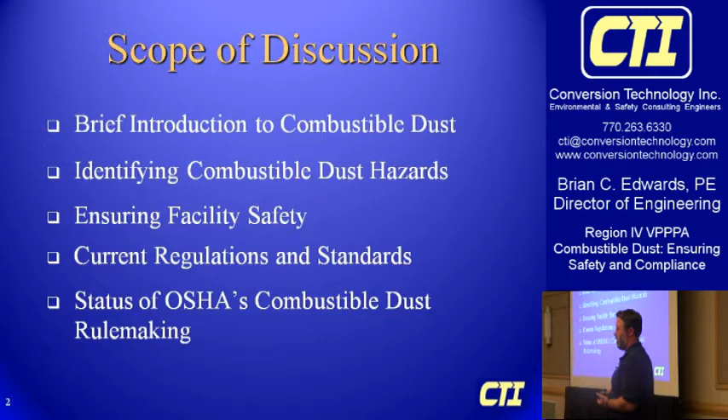So just in general, combustible dust is a major issue in industrial facilities that generate this product. The Chemical Safety Board said that of the top 5 worst industrial accidents that they've investigated, 3 of those involve combustible dust. In 2008, following an explosion in Savannah at Port Wentworth Imperial Sugar Plant, OSHA reinstituted a national emphasis program.

That helped them conduct inspections under the program and provided industry guidance. In October 2009, OSHA came up with an advance notice of proposed rulemaking where they said they're going to work towards creating a combustible dust rule. And some states have went ahead of OSHA, such as Georgia and California, and they've instituted their own rules about combustible dust safety in the workplace.

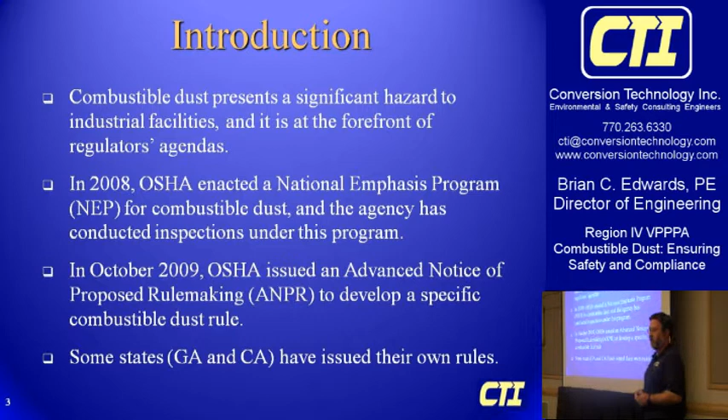Just in general, what do we mean when we talk about combustible dust? We're really talking about any particulate solid material that can present a fire hazard when dispersed in the air, regardless of size or shape. This is according to NFPA. Traditionally, if it's a combustible particulate solid and you throw it in the air and it creates a cloud, it floats around, stays in the air, then you might have a combustible dust. This is typically dry foods, wood, plastics, textile, organic materials, and even some metals such as aluminum, magnesium, things like that.

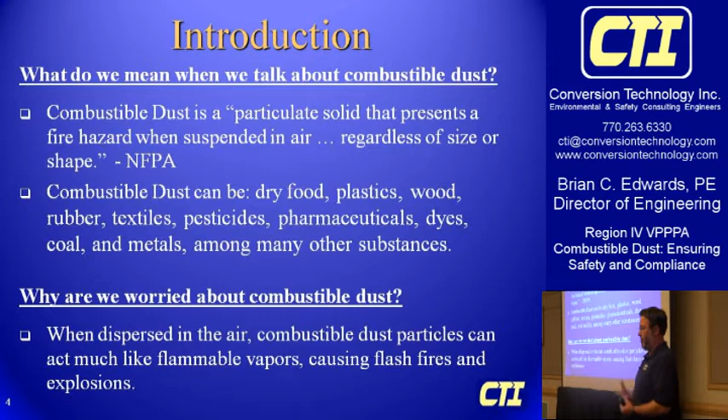And why we're really concerned about it is because when you disperse it in the air and you have a thick enough dust cloud, if you ignite it, it acts much like a vapor cloud. So people think of solid materials as burning different than, say, vapors or liquids. But if you disperse dust in the air, it can have a flash fire just like a vapor cloud. And the reason that happens is because the rate of combustion of a material significantly increases as you get smaller particles.

And what happens is, if you remember the fire triangle, you have to have fuel, you have to have oxygen, and you have to have heat. So say you had a log, all the wood particle, that fuel that's in the middle of the log, it's not touching oxygen. So you're missing part of the fire triangle.

Well, if you turn that log into sawdust and disperse it in the air, then all that fuel is touching oxygen, so all of that fuel can burn at once. You don't have to burn through the outer layer of the log to get down to the center of it, so basically all of it will burn in an instant, just in a flash. You have a flash fire, and that's the danger here.

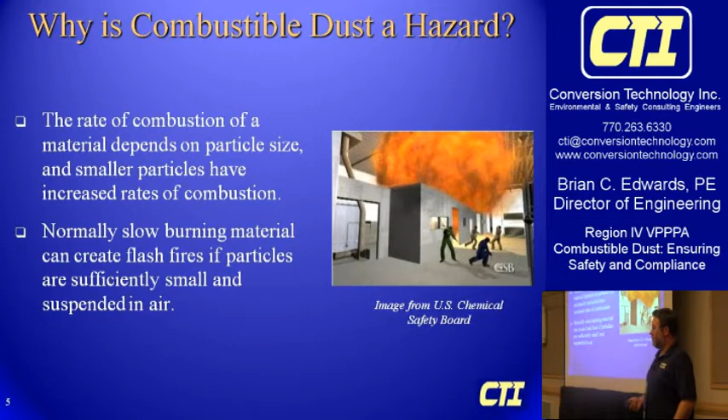One of the largest dangers is that dust can accumulate in overhead and hidden areas. The stuff that accumulates in those high areas is often the finest material—the stuff that's lightest, that hangs in the air the easiest. So it accumulates in these hard to reach, hidden areas.

You can have a primary explosion, say in a single piece of equipment, like a dust collector or a boiler, that sends a shock wave through and disperses this dust cloud. Then basically the entire room can be filled with this hazardous dust cloud atmosphere. If that ignites, it spreads throughout the entire facility. So something that was isolated in a single piece of equipment disperses accumulated dust and creates a secondary explosion that could decimate an entire plant.

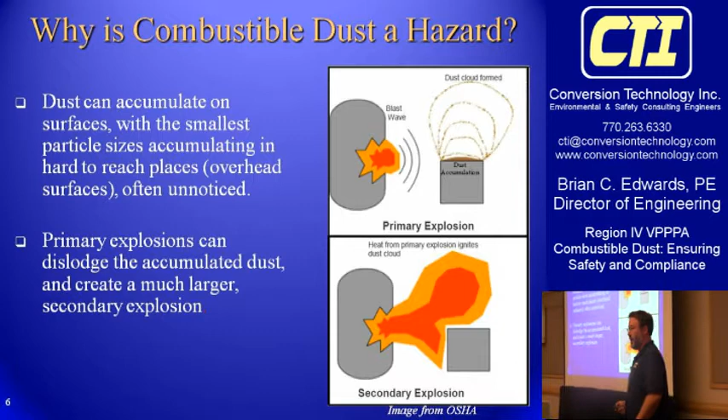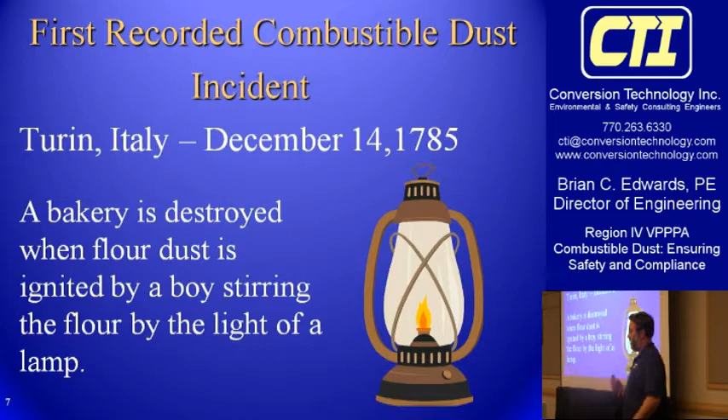I mentioned that the National Emphasis Program came out in 2008, but this has really been an issue for a long time. The first actual recorded combustible dust incident happened in 1785 in Italy. A boy was stirring flour by the light of a lamp, he created a cloud, and the lamp ignited the flour and destroyed a bakery.

Some examples of incidents just this year: this one was in British Columbia at a sawmill, the second large explosion at a sawmill in this area of Canada this year. This most recent one had 2 killed, 22 injured. The first incident, the other explosion in British Columbia, was similar—multiple fatalities and a lot of serious injuries.

In this particular incident, a resident 2 kilometers away felt his house shake and vibrate because of this explosion. One interesting thing to note is that a change of material was probably a large source of this incident.

I don't know how many people are familiar with sawmills and planer mills, but typically in a sawmill you're processing green lumber, so it has high moisture content. It clumps together—that green sawdust doesn't really form a dust cloud in the air. The high moisture content means it doesn't have much flash fire potential because you have to evaporate the moisture before it burns. So you don't get the flash fire like you do in a planer mill, which dries the wood after a kiln and creates fine wood shavings that are a lot more combustible.

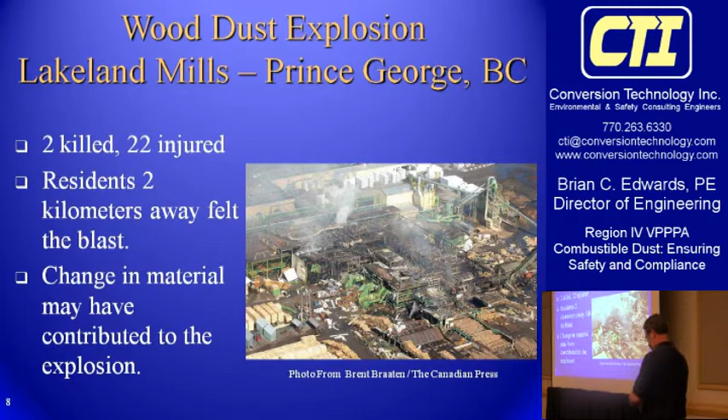We'll get into some basic definitions. How many people have ever heard of the word deflagration? It seems like a pretty knowledgeable group here today.

In general, when we talk about deflagration, you can think of a flash fire—imagine a fireball that consumes a dust cloud, flashing through an area. A dust deflagration goes very fast, still talking less than a second, and it can move through an entire area. It goes a little slower than a vapor cloud—vapor clouds go quick, dust clouds are a bit slower, but still within milliseconds, less than a second. Still not enough time for somebody to get out of the way of these deflagrations.

So how do these occur? You need small enough particles—fuel, these are combustible particles that when thrown in the air can float around and create a cloud.

You need that fuel to be in a cloud of sufficient concentration to propagate the flame front. Imagine a little speck of dust—when it ignites, it has to be close enough to the next piece of dust to ignite it, creating that flash fire. Next, you need available oxygen, and then some type of ignition source—some energy or heat source.

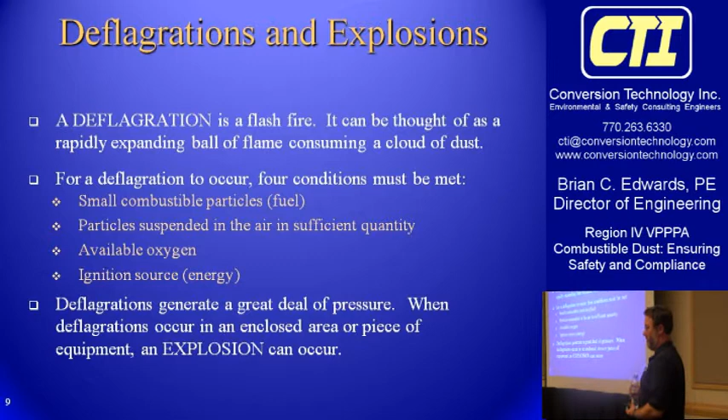When deflagrations occur in open air, they still generate a pressure wave from the overheating gas. But if you put that deflagration inside an enclosed area, like this room, or inside a piece of equipment like a bag house, dust collector, or bin, that enclosure can't contain the pressure generated when the flash fire occurs. That's when you'll have an explosion.

I like to think of deflagrations and explosions as cause and effect. You have a deflagration that occurs inside a vessel, and that is the cause of the explosion. Technically, an explosion is the rupturing of an enclosure—when that enclosure ruptures, it releases that pressure outside. So a deflagration occurs inside an enclosed area, and it causes an explosion.

Industrial dust explosions can create chain reactions, moving through areas in the plant. It might start in one room—you have an explosion, it blows out a wall into the next room, blows out another wall, and it goes through. This can also happen in the process itself. For instance, you might have a cyclone that exhausts to a bag house. An explosion can occur in the bag house, and the flame front will actually travel back upstream against the flow of air, back to the cyclone.

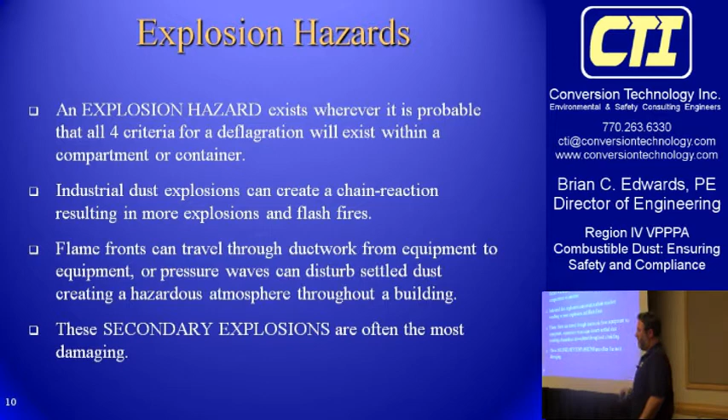I've actually seen this happen several times. One time I was in a plant—a wood pellet mill—that had one bag house tied to two separate cyclones on two different lines. They had a deflagration occur in one cyclone. The flame front went to the bag house, exploded, and traveled back upstream to the other cyclone, and also upstream into the process area where they had connections going inside the pellet mill itself around equipment. Often these secondary explosions, this transfer of explosions through the process or through areas, are the most deadly.

As I mentioned earlier, OSHA has put out an advance notice of proposed rulemaking, but they don't have a rule yet. So you can't afford to wait on OSHA before addressing these hazards. I'm going to go through what you should do at your facility to address combustible dust hazards. In general, the first step is to really understand what type of hazards are present.

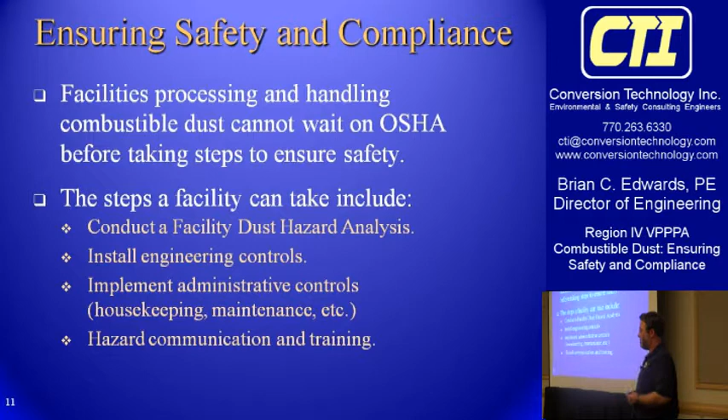You can conduct a facility dust hazard analysis so you understand how severe the hazards are in your workplace. Next, you'll want to install engineering controls and at the same time implement administrative controls such as housekeeping and maintenance. Also make sure you implement hazard communication and training.

So how do you really identify the hazards in a workplace? I'm going to go through the steps you need to take to identify where combustible dust hazards might exist and how to quantify them.

The first step is to know what type of dust you're handling—what dust is combustible, what isn't, and a relative value of how dangerous the different dusts are. Next, itemize all the processes where this dust is handled, generated, and processed. Then look at the open and hidden areas, the rooms and facilities, and identify where dust accumulation is present. Finally, you also look at ignition sources.

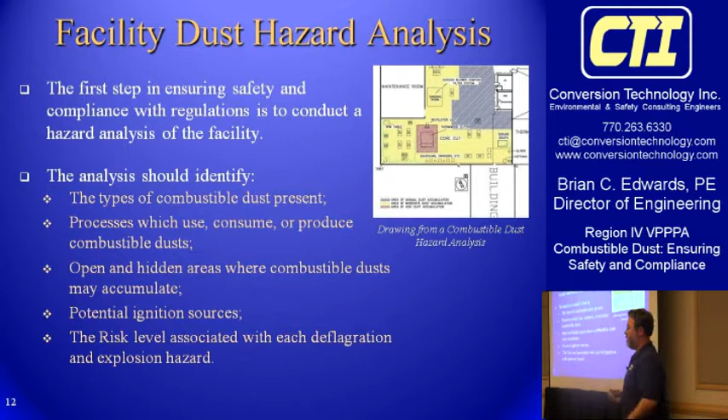Then you want to rank how dangerous these different places are, because not every hazard is equal. As I'll describe later, addressing this can be very expensive, so you want to make sure you take care of the most dangerous aspects first. Then come up with priorities—you'll want to try to come up with some risk ranking.

Okay, so the first step is identifying the types of combustible dust. You really want to look at all processes to see what type of dust is handled. Do we handle powders? Do we add components, or do we create powders? Or is our dust just a byproduct of what we do? Is it coming off grinders? Is it coming off milling? Is it not really a main part of our process?

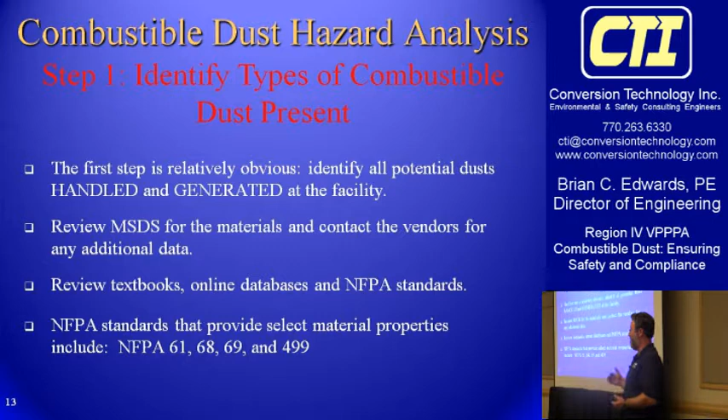If you're somebody that handles powders, you want to look at MSDSs, contact the vendors and manufacturers, and see if they have any data on the dust. If they don't, and if it's a common material like flour or sugar, you might be able to look online, look in textbooks, or look in some of the NFPA standards, which have some of these dust explosion parameters. But more often than not, you might not get data from a vendor, and that data won't be readily available. Not everybody is handling something as prevalent as flour or sugar or wood dust, so you might have to go out and get your own data.

So I'm going to discuss a little bit about the tests and how they're used. There are a number of labs where you can send your dust to be tested to see how dangerous it is. The first three tests I talk about deal with how easy they are to ignite, so it's about ignition sensitivity. The next tests deal with how severe an explosion is if it occurs.

We talk about minimum explosive concentration, and what that tells you is how thick a dust cloud has to be in order for there to be an explosion or deflagration. If you're familiar with industrial hygiene and IH standards, dust exposure is normally measured in milligrams per cubic meter in the air, so that's stuff you might not even see. When we're talking about explosible concentrations, we're talking about grams, so like 1,000 times higher than what you'd want to see from a respiratory standpoint.

Because of that, typically you're not generally operating at a minimum explosive concentration in the area. But inside process equipment, you can be at that level, or if you have that dust disturbed in the air, you can reach that level.

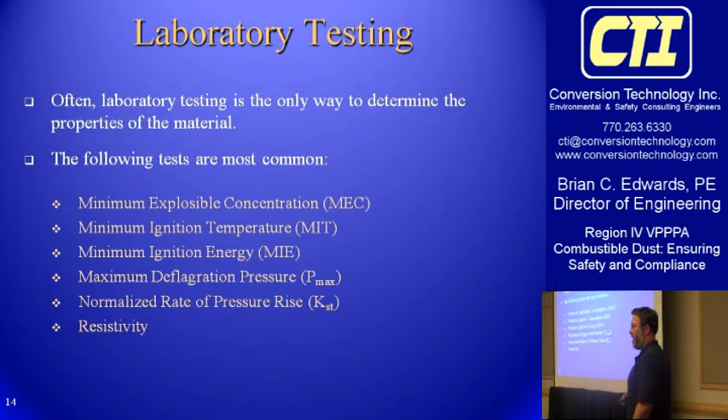Next step you really want to itemize and understand where dust is being handled, where it's being generated, what type of processes you're talking about. Look through your facility, come up with a checklist, deal with anything like particle size reduction equipment. That's going to be hammer mills, hogs, chippers, any grinding type operation. Those create dust, and they're also high likelihood ignition sources.

Also, you want to look at bins, tanks, and silos, because when you're filling a bin or filling a tank, that's one of those likely times where you might have an explosive dust cloud in the void space. As you're putting solid material in there, that lighter material still fills that space, so you can have explosions there. Also look at dryers and ovens.

Those can ignite and create burning embers and spread them downstream. Look at dust collectors - you almost always have that explosive concentration inside a baghouse or dust collector. Also look at conveyors, screw augers, bucket elevators. All those are areas where you can have ignition sources, like overheated bearings that can be transferred downstream. And then look at sifters, screens, classifiers, anything that creates that dust cloud inside the piece of process equipment.

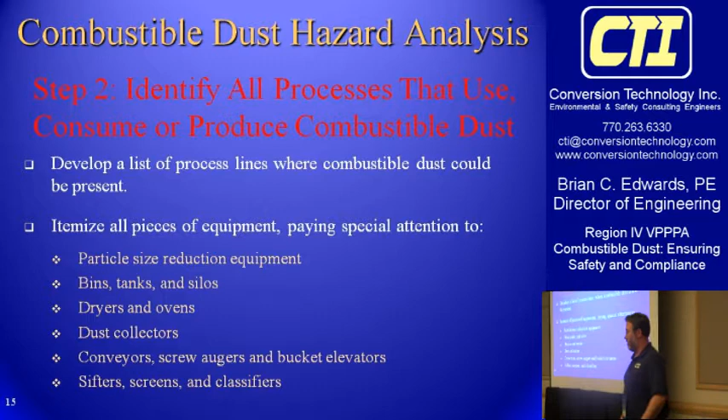After you've looked at the individual process equipment, you want to spread out and look at the facility in general. Look at the different work areas, the environments inside the facility where dust can accumulate. Pay special attention to those hidden areas where people frequently don't visit, maybe where housekeeping doesn't get to every day.

You really want to look at overhead piping and beams, drop ceilings, any interior overhead surfaces like control rooms or mezzanines, because those are areas you might not realize it, but there might be a significant volume of dust up there. If it gets disturbed, then the entire work area could become an explosive environment.

So any housekeeping you do, you want to make sure you look at all the areas, not just what you see on your day-to-day operations. Make sure you go up there, look on top of control rooms and on rafters and in pipes.

You also want to look at areas where dust might be released at a large quantity because of upset conditions. I was at a bakery, just a two-line bread bakery, and during normal day-to-day operation, it looked spotless. Over by the oven, you saw no dust accumulation at all. But as we started talking, I found out that about once a year they would blow out a conveying line.

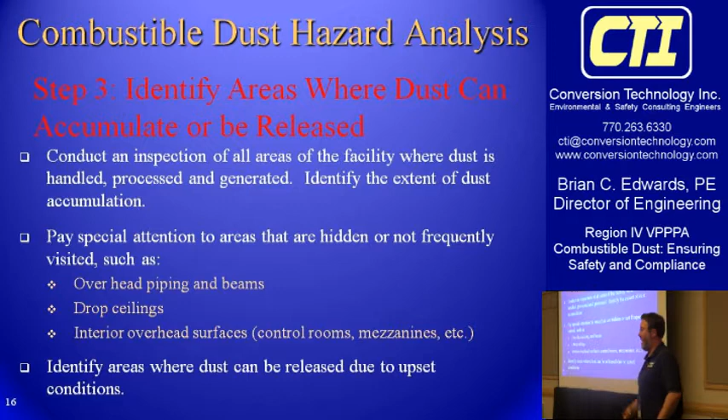And just spew flour into the bakery within about 30 feet of the dryer. So if you keep doing that, you need to look at areas where, okay, normally we don't have this dusty environment, we don't have dust accumulation, but if we had a rupture of a pipeline, or if something went wrong, we could generate an explosive atmosphere because of creating a dust cloud.

All right, once you know where you might have a dust cloud present - say inside pieces of process equipment, or inside a work environment - you want to look at what type of ignition sources you have in that area.

Some of the common ignition sources are friction, any moving parts, any metal on metal contact. If it's not properly maintained, not inspected, not cleaned, it can generate heat, and that's a very common source of ignition. So maybe in a conveyor, you'll have a piece of material get hot from a bearing, and that burning ember is transported downstream. It gets picked up in a dust collector, and there's an ignition source.

Also, another potential source is smoking. Hopefully people aren't smoking in dusty environments, but you'd really be surprised. I've seen people - one of our clients went to a sawmill and they allow people to smoke in a sawmill.

Next is static electricity. This is one that a lot of people sometimes overlook, but really, anytime you're conveying powders or particulates in a ductwork, it generates a lot of static electricity. You might not think static electricity is that dangerous, but just the shock you get, say if you're in a dry, cold wintertime, when you hit a doorknob, that's enough energy to ignite most dust clouds.

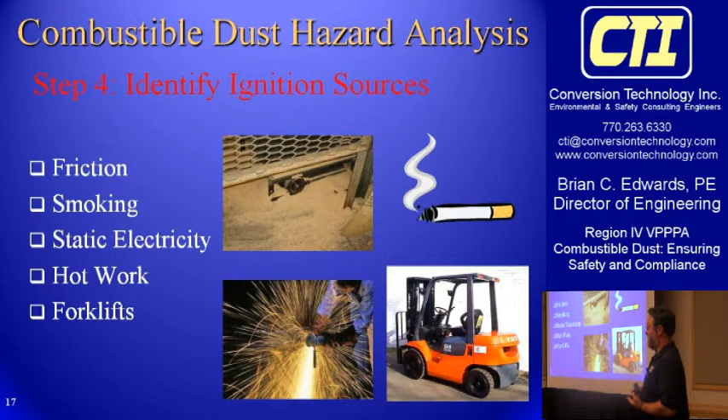Another issue is forklifts. If you're working in a dusty environment where you could generate a dust cloud, you want to make sure that the fork truck you're using is properly rated for that. So you'll see trucks will be DE or EE or EX rated forklifts.

Also, you want to look at electrical sparks and arcing. If you have a potentially dusty environment, you need to have it electrically classified - classified as a hazard location, with dust tight or dust ignition proof equipment there.

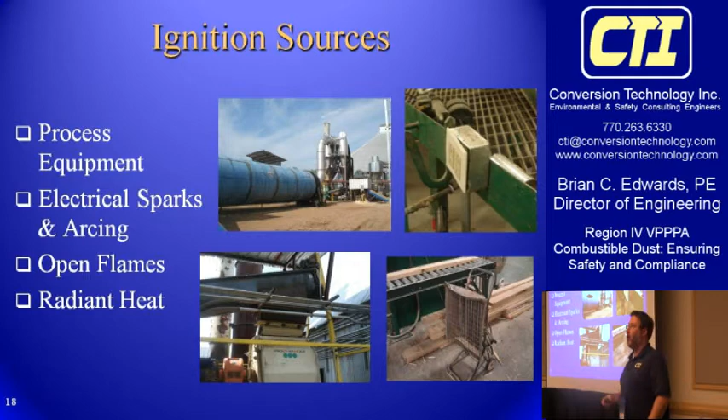Also, you want to look at potential open flames, space or radiant heat. So if you have any space heaters, or radiant heat, say hot surfaces in an environment, or if you have lighting that might not be protected, those can all be ignition sources.

Once you've identified where a dust cloud could be present, inside a process or inside the work area, and you've also identified what the potential ignition sources are, you want to determine the likelihood of those being present - what's the likelihood of there being a dust cloud and an ignition source in this area.

Wherever you have potential for an explosive dust cloud, or anywhere you have potential for dust accumulation, you want to look at what could be the effects of a deflagration or a fire in that area. You really want to look at, is it an occupied area? Is it close to other critical processes? Is this a piece of equipment where we have a high likelihood for dust cloud and a high likelihood for an ignition source? Is it close to other pieces of equipment that are important?

You want to look at the severity of, say, a dust incident here. I'm about to show you a table - it's going to look a little overwhelming when you first see it, so I'm just going to briefly go through it today. But if anybody wants to get a copy of this presentation, or talk to me a little more about this, let me know afterwards.

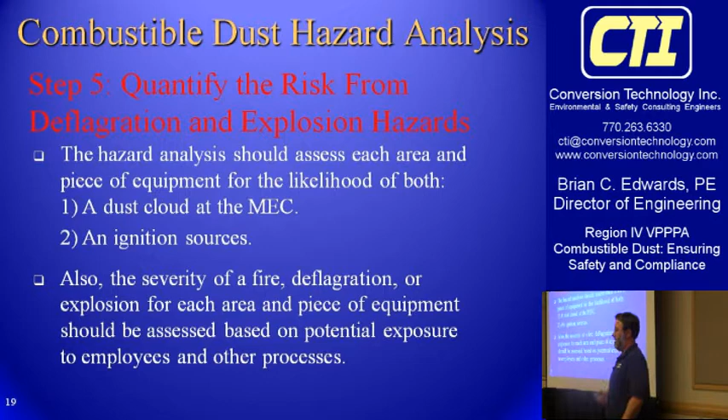Does anybody here operate under process safety management? Then you might be familiar with a process hazard analysis. This is essentially a 'what if' - it's a way of determining how dangerous a particular incident is, and that way you can come up with priorities.

I saw something not too long ago from OSHA. I mentioned OSHA is coming up with a rule. They said that for the average facility to come into compliance with NFPA regulations or OSHA's proposed rule might be looking anywhere from $350,000 up to over $1 million, depending on the industry. Some paper industries might be looking at over $1 million just to comply with the proposed combustible dust rule.

When you're looking at that type of volume, I know it's very hard for you to take that up to management and say, okay, write me a $500,000 check. So what this table does is allows you to prioritize the risk and your recommendations. That way you can say, let's come up with maybe a 5-year plan and address all the things that are extremely high hazards.

But I'll go through what it does. This was one we did for a wood pellet mill. So you come up with the what-if scenario. What if there's a fire in the cyclone? You talk about what are the causes, what are the consequences. You make that into severity and likelihood, and the combination of how severe it could be and what the likelihood is helps give you what's called a risk ranking. Then you want to talk about safeguards and come up with some recommendations.

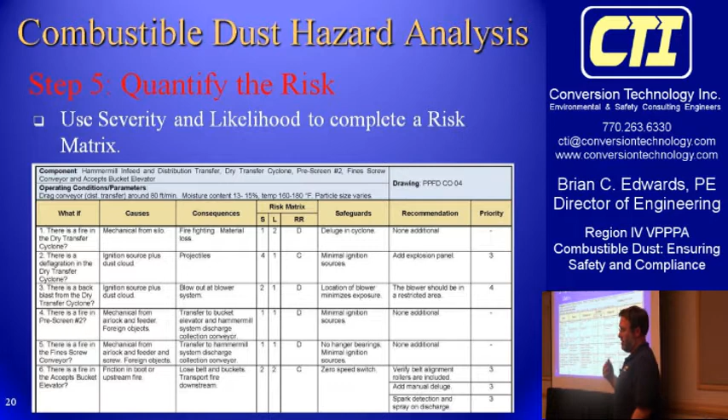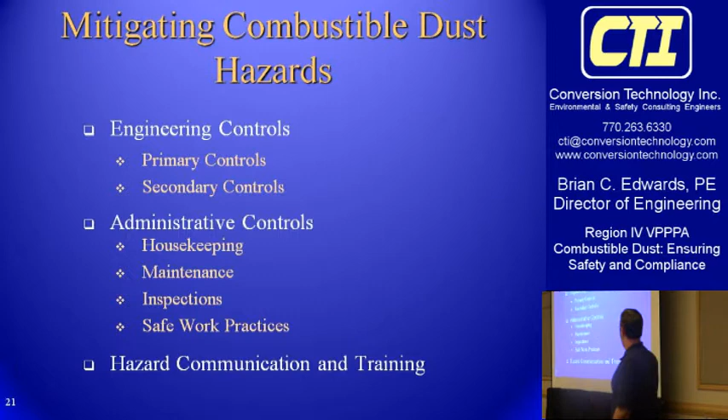All right, once you understand the hazards, I'm going to briefly go into some of the things you can do to help control those hazards. Once you've done your hazard analysis, you know what type of hazard you have at the plant, here's some of the things you can do. Honestly, this is something I could probably spend a day talking about, all controlling these hazards, so I'm just going to hit the high points and go through them relatively quickly. Talk about engineering control, administrative control, and also hazard communication and training.

So first I'll talk about primary engineering controls. And when I say primary, what that means is controls that are used to just prevent a dust explosion from happening in the first place. The easiest way to be safe is just to not let it happen.

So what you want to do is have fugitive dust control. This means keep dust out of the air, keep it from accumulating in the environment. You do this through good dust collection, good housekeeping, and tight equipment. If you have conveying lines and you see sources of leaks of dust in your processing line, try to address them. Is there a different way we can handle this material so we don't have to have a person out there full-time doing housekeeping? Are there ways that we can get this better?

And then also another primary control is ignition source reduction. If you don't have ignition sources, you can't ignite a potential dust cloud. So you do this through electrical classification. If you could have a potential dusty environment, make sure all the electrical equipment is maintained properly and it's rated for the area, so it's dust-tight equipment. Make sure all your conveying lines and equipment that are handling dust are bonded and grounded. Use properly rated industrial trucks. And if you're handling a lot of particulates, if you're moving them a lot, you want to try to get foreign object removal—have magnets, screens, gravity separators to keep those foreign objects that could be ignition sources out of the moving stream.

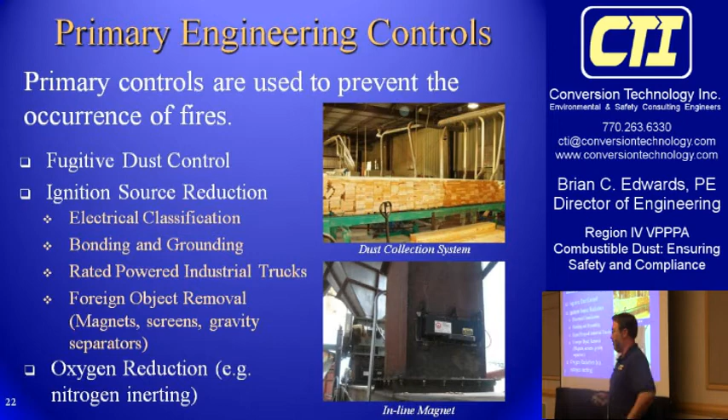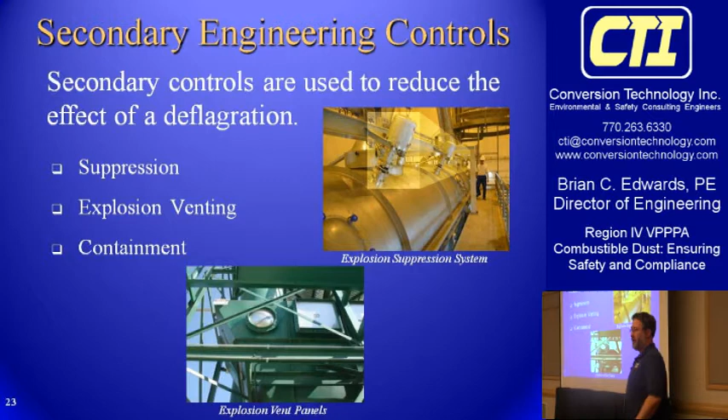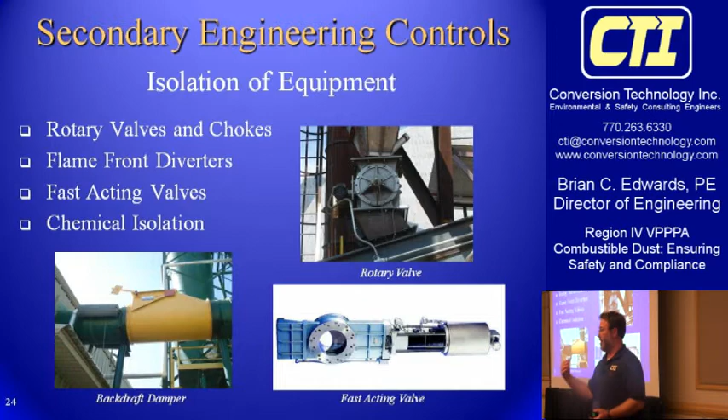You can also have flame front diverters - an example, say a backdraft damper, or a flap valve, where if a flame front is coming through, instead of going back into the work environment, the flap will drop and the flame will be shot up into the air. Then you have fast-acting valves and chemical isolation. Those have detectors in the ductwork, and if they see a flame front coming, it shuts off that ductwork either with the valve, or it sprays chemical into the ductwork, so when that flame front comes, it hits that chemical and extinguishes it.

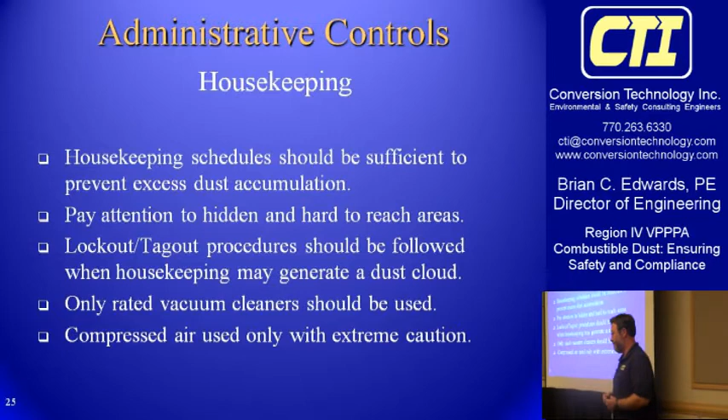Also, another important thing is maintenance. You want to make sure all your bearings and belt alignments are up to speed, because bearing overheating is a large, common occurrence as an overheating source. Also, if you have explosion protection, you want to make sure you maintain that.

A lot of people don't realize it, but if you have an explosion vent panel on a cyclone, you're supposed to be inspecting that at least annually, and the same thing with any suppression systems. Just like your fire extinguishers that you check once a month, you want to do the same thing for explosion protection equipment, so make sure those are on your PM schedules.

And also for maintenance, if you have leaks in equipment, you want to address those as quickly as possible, because if you let a leak go on, that just means you're having to do more housekeeping.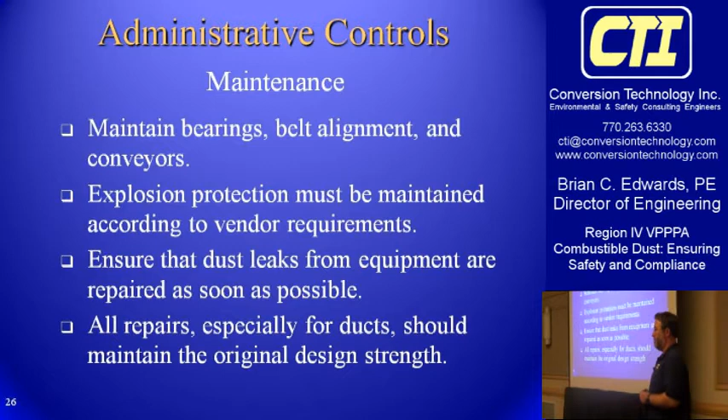Finally, make sure all repairs you do keep the original strength, especially with duct work. Duct tape's great for HVAC units, but you don't want to put that on actual conveying lines or dust collection where you have combustible dust, because you don't want duct tape on a piece of duct in your work environment and have that be where the explosion comes out. I wouldn't want to work next to a conveying line that's been sealed with duct tape, because that's where the flame's coming out right there.

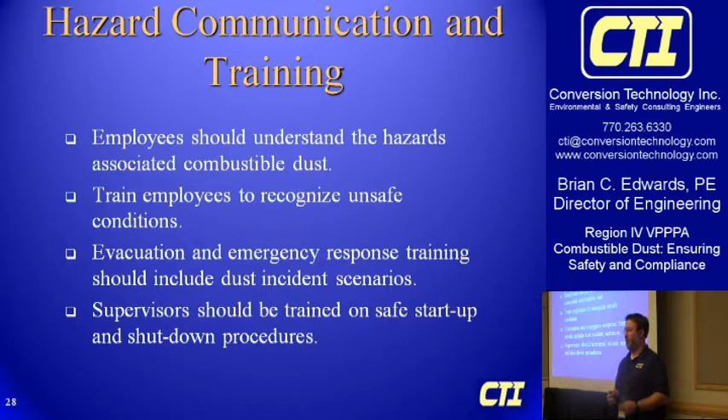So I'm about to get into a lot of the regulatory issues. Does anybody have any questions on the basics of combustible dust, the hazard control, hazard analysis before? Yes.

Well, first of all, there's some guidance. You can look at OSHA Subpart S, Electrical Safety Standards. What you want to do is classify the areas in your workplace—you have to say, okay, is it likely that there's going to be a dust cloud or not, and there's some guidance on that. NFPA wrote NFPA 499, which gives you guidance on how to come up with what they call hazardous locations. These are areas where either during normal operations you're having a lot of dust in the air, or you have a lot of accumulation, or you could have some upset condition that creates a dust cloud in a work environment. If you have any of those conditions, you're going to want a rated fork truck.

The more detailed definitions are in NFPA 499 and the National Electric Code. But if you have an area where, through upset conditions, you could have a dust cloud in a work environment, then you need to have an EE, DE, or explosion rated dust type rated fork truck. They go through what that means - you have enclosed energy sources, spark arresters maybe on exhaust, some things like that. But you just look for the EE or EX ratings, or DE, diesel DE ratings, and a rated truck for that environment. You can find guidance on that in NFPA and other places.

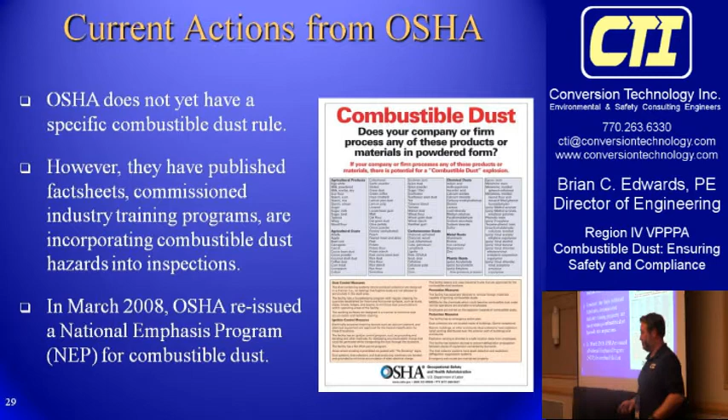All right, I'm going to move on to OSHA standards right now. As I mentioned before, OSHA doesn't have a specific combustible dust rule right now. What they did, they instituted a national emphasis program where they basically gave guidance for inspectors to look for hazards in the workplace, and they gave some training to industry.

Instead, what the NEP talks about, it doesn't mention a specific combustible dust rule, but it mentions other regulations that are already in place. So it talks about housekeeping regulations - housekeeping already requires that you keep a clean and sanitary environment.

It mentions personal protective equipment. Basically, you're required to do a job hazard analysis, and a dust explosion or explosive atmosphere should be included as one of the hazard scenarios that you look at when determining what type of PPE is required. Do we require flame-resistant clothing? If you're working in a place that has potential vapor clouds, if you're in a refinery, every day you walk in, you have FRC clothes on. So you have to look, are there areas in my work environment where there's an explosive dust cloud potential? They mentioned that with respect to personal protective equipment.

Also, the electrical standard already addresses potential for explosive dust in the hazardous classified locations section. And hazard communication - OSHA says you have to inform employees about the hazards that they're exposed to. So if employees are working in areas where you're exposed to dust fire or dust explosion hazards, they need to be aware that I'm exposed to this type of hazard.

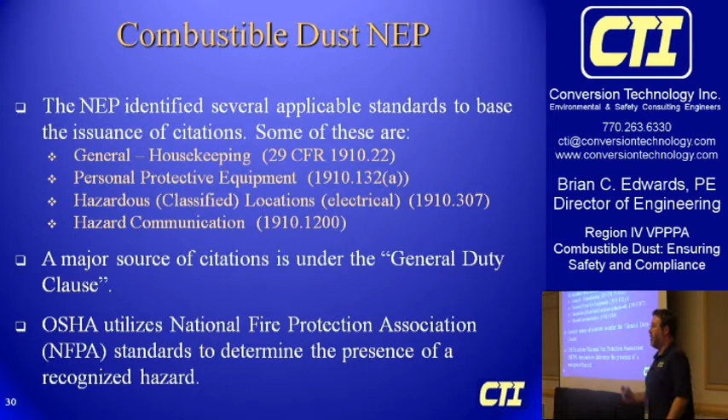But in general, under the National Emphasis Program, OSHA mentions the General Duty Clause. The General Duty Clause basically says that an employer is responsible for providing a workplace free of recognized hazards. OSHA utilizes the National Fire Protection Association, NFPA standards, to say these are recognized hazards, and so you have to provide a workplace that's free of these hazards, or that you do everything you can to minimize those hazards. In general, here's some pictures showing examples of violations under OSHA's National Emphasis Program.

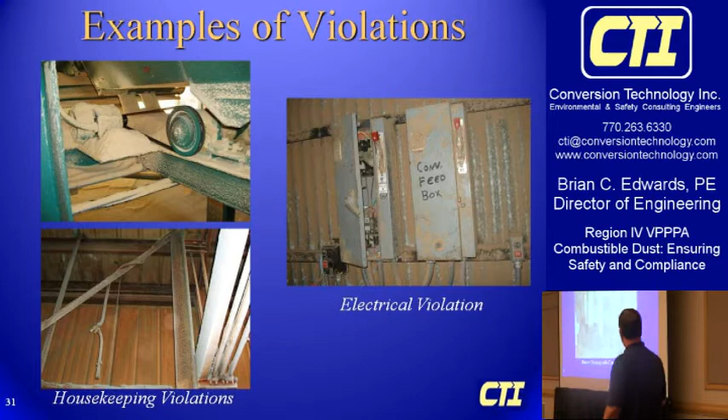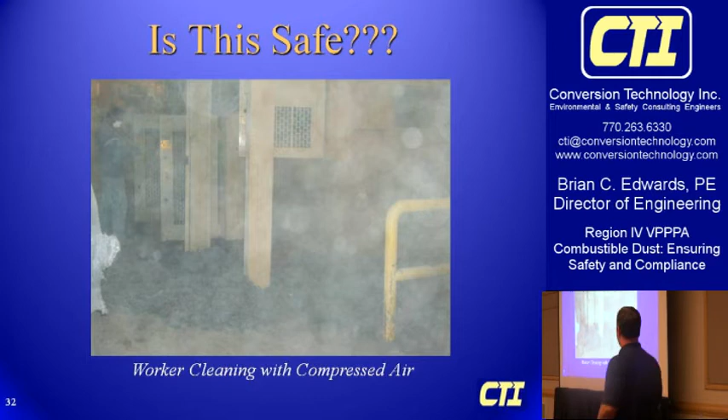But also, about 10 yards away, they had maintenance going on an energized piece of equipment, so they were not following lockout tagout procedures. They had the control panel open on a piece of equipment, exposed electrical parts, about 10 yards from where this guy was doing this. Luckily, OSHA stepped in. They've cleaned up their act, but that's just an example of what you do not want to do.

Earlier I mentioned the NFPA standards. The National Fire Protection Association is an agency tasked with coming up with standards for fire prevention training. They came up with the National Electric Code, they govern life safety standards, they come up with fire sprinkler standards, and they also have several standards addressing combustible dust.

NFPA in itself is not an enforcement body. All they do is write standards that other people take and enforce. The people who actually enforce them are called authorities having jurisdiction, typically your local fire marshal. But technically OSHA is an authority having jurisdiction, your insurance company is an authority having jurisdiction. Anybody who can reference these standards is an authority having jurisdiction, and they can enforce these rules.

Specifically, OSHA uses NFPA standards to show evidence that industry has recognized combustible dust as a hazard, because some of these combustible dust rule standards have been in place since the 1920s. I think that's when the wood processing standard first came out, in the 1920s. Grain handling too—it's almost a century of industry recognizing dust as a hazard.

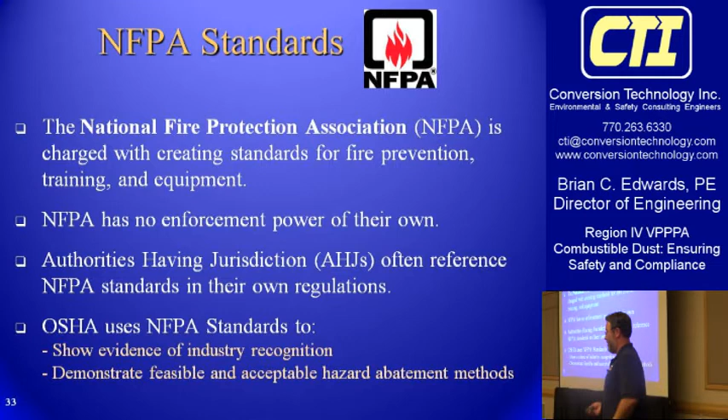Some of the NFPA standards you might want to look up: NFPA 654 is sort of a catch-all standard that addresses almost all combustible particulates. So if you have combustible particulate solids not covered by a specific industry standard—if it's not an agricultural food product, metals, or wood processing—you're probably covered by 654. But if you're a sugar refinery, you're covered by NFPA 61. If you're a wood plant, you're covered by NFPA 664. If you're generating aluminum dust, you're under 484. There are additional NFPA reference standards that address combustible dust as well.

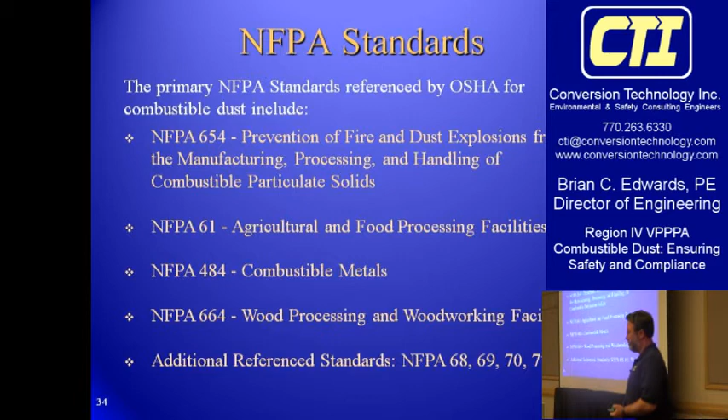In general, what OSHA looks for, and what they mention in their NEP, are dust collector problems. Say you have a dust collector located inside, or the return air comes back inside—you might have a cyclone exhausted back inside, and it really needs to be 99.9% efficient if you're going to have return air coming back inside the building from a dust collector.

They're also looking for any process equipment with an explosion hazard that doesn't have any type of protection on it. They look for any case where ductwork isn't grounded or not conductive, and any type of equipment that's connected where different pieces of equipment have explosion hazards but you don't isolate that ductwork. That's been a source of fines.

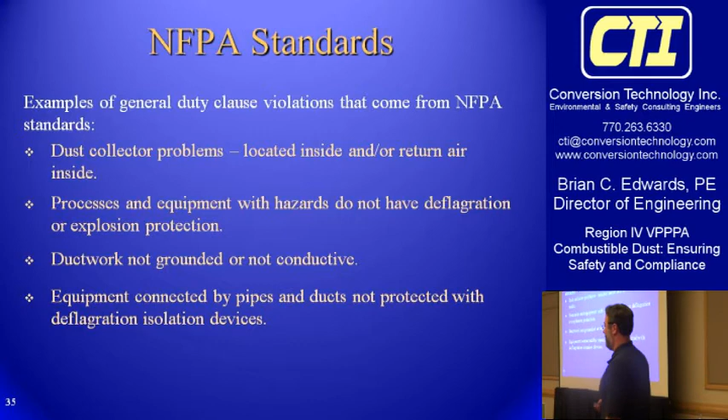Question: Is accumulation of dust in outdoor areas the same hazard as indoor areas? Typically, it's not. I see a lot of places with loading bins or outside areas around chippers where you'll have dust on the ground. Typically that's not as large a hazard—it's still a fire hazard, still a housekeeping hazard, and your local environmental people probably aren't going to like it, but it's not a big hazard.

Just because it's harder to contain that dust cloud, and typically outside areas you're not going to have the exposure to employees as you do inside. Most of the time when we talk about that, you're talking about indoor areas, or partially enclosed areas could still be an issue.

Here's some example violations OSHA issues based on NFPA standards. We'll start with this cyclone located inside, off a wood pellet mill. There's an ignition source conveying particulate to this cyclone. You have high concentrations of dust in here. There's no explosion protection, so you basically have a bomb located inside a building where employees are located next to it, and you have no means of protecting them.

Two, as I mentioned, this goes back to other critical process equipment, and to areas where there are employees exposed. There's no isolation on this, so there's no way to prevent that explosion, that deflagration, from traveling back to a heavier occupied area.

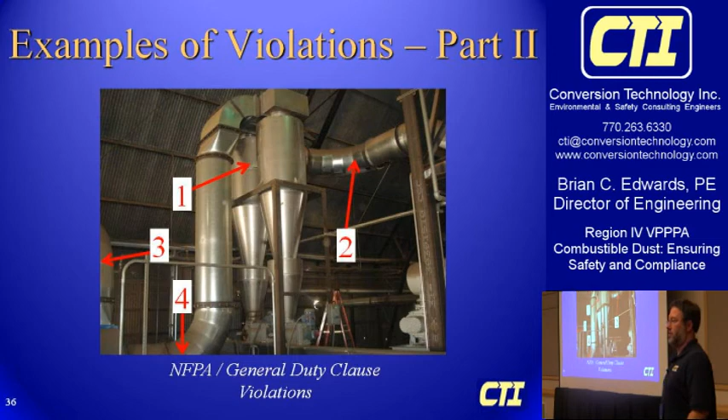And four, this is a conveying system. It was a dust collection system, but it wasn't grounded at all. There's no grounding on this whole system. So those are four violations OSHA could have cited them for. Luckily, they got it fixed. I'm running out of time right now, so I was going to go through what OSHA is doing, but I want to give a little time to answer some questions.

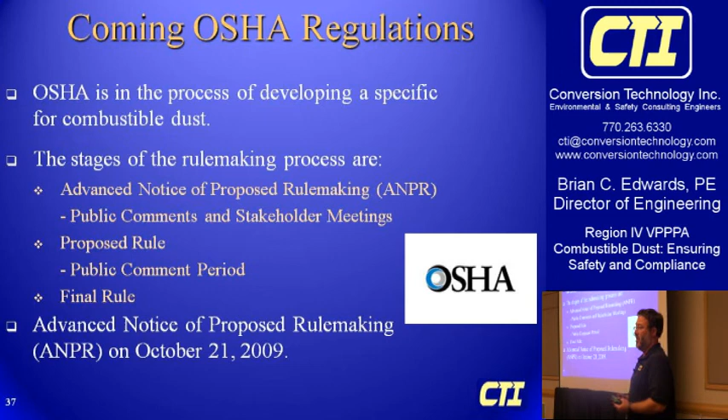But just in general, they are kind of at a holding pattern right now. They have an advance notice of proposed rulemaking out, issued in 2009. Right now they have to come up with some type of cost associated with how expensive they think this dust rule is going to cost, and I think their initial assessments are that it's extremely expensive to industry. So because of that, what I've heard is it's moving at a glacial pace. They've had expert forums, stakeholder meetings, they're currently doing research, but we don't think there's going to be an actual rule anytime soon.

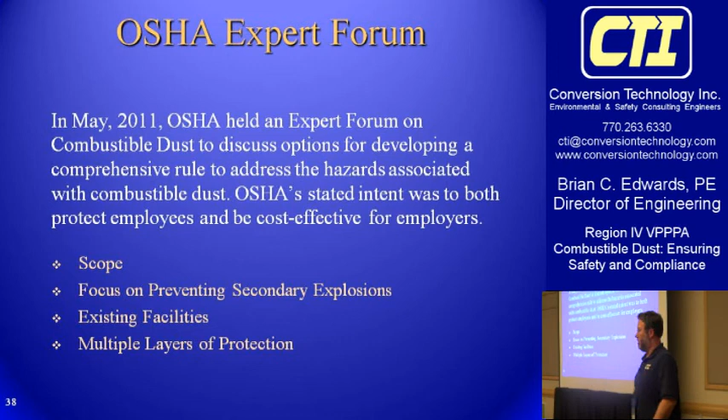But again, that doesn't mean you shouldn't address combustible dust hazards now. In general, the next formal step is that OSHA is going to issue a proposed rule, whether that's 2 years or 5 years from now, we don't know. Once that proposed rule is issued, there will be a comment period. I can't say for sure what that's going to have, but if I was a betting man, I would say it's most likely going to require some type of administrative and engineering controls.

In general, housekeeping and training, I think, are going to be the most important things. Preventing secondary explosions are going to be critical, so housekeeping is going to be a huge part of that, and employee training and hazard communication will also be a big part of it. It's possible there's going to be some type of risk analysis required in the ultimate rule, probably nowhere near, say, process safety management type PHAs, but what I've heard some people say is maybe a PHA light—toned down from a PSM facility, but with some similar components.

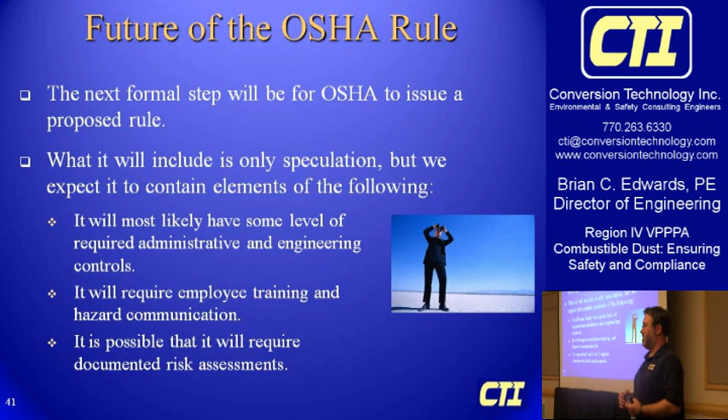All right, does anybody have any questions?